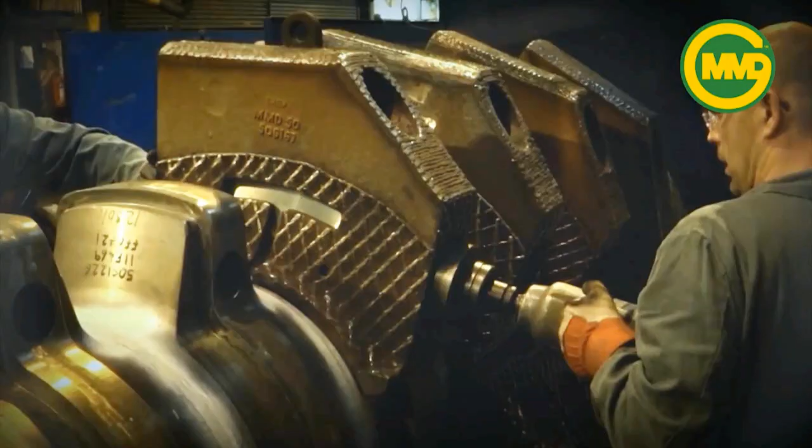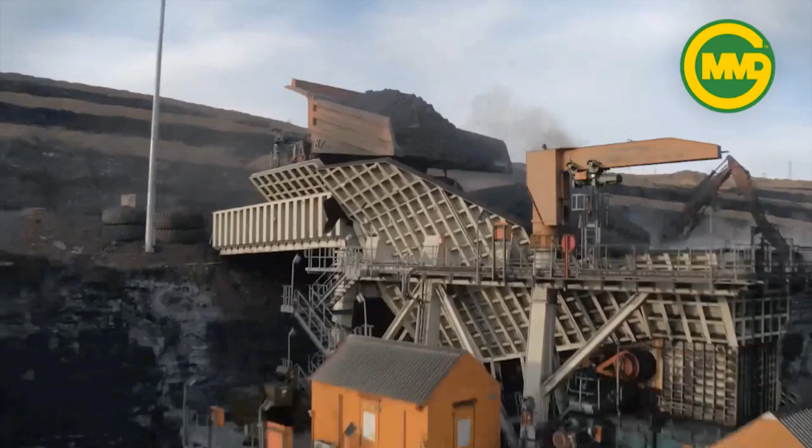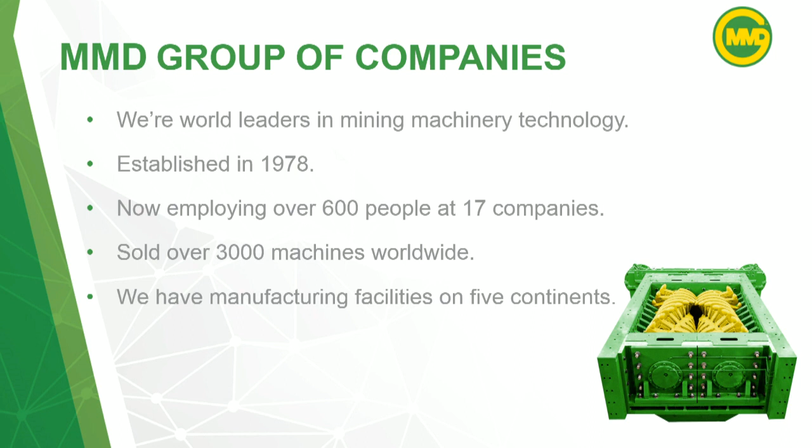So just a short video of MMD's existing equipment to show you what our capabilities are. A quick rundown of who we are. We believe that we're world leaders in mining technology. We were established in 1978, just over 40 years ago. And from a company that started with 10 or 12 people, we're now employing over 600 people in over 17 companies around the world.

We've sold over 3,000 sizers in many countries around the world. We now have manufacturing facilities on 5 continents. A quick overview of where our offices are around the world. We have an even spread in most parts across the world. And our manufacturing facilities: the UK, top left, is where we started, and that's the same office today as we started in almost 40 years ago. Australia, China, South Africa, and India. So we're very proud of what in essence is a small, family-built company.

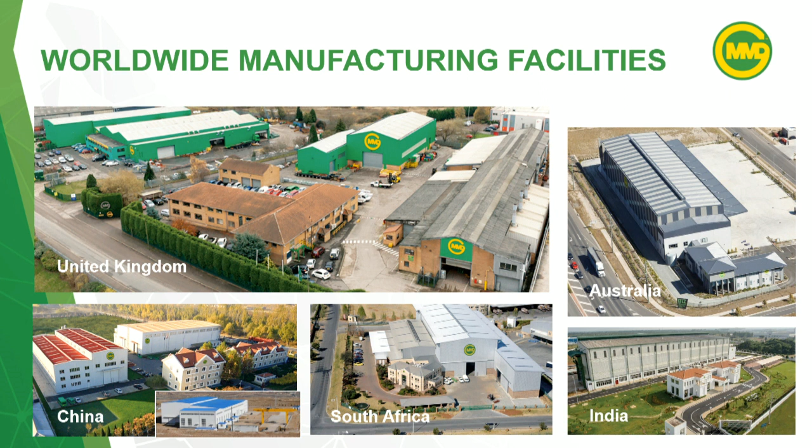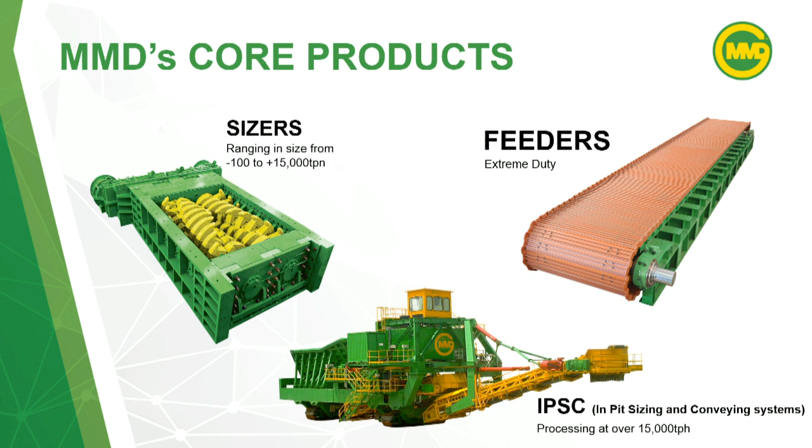Our core products: initially we started with the sizer there on the left. Pretty simple piece of kit, but we've now sold over 3,000 of those machines, doing anywhere from under 100 tons an hour up to over 15,000 tons an hour. We then went on to manufacturing feeders, not necessarily because we were looking for a different product. We were just looking for a feeder that we could dump a truck onto, and we couldn't find one out there.

So what we made is what we call an extreme duty feeder, because everybody calls their feeders heavy duty right now. It's not the cheapest feeder in the world, but it is the strongest feeder in the world. And we incorporated those 2 pieces of equipment into many mining applications: static, semi-mobile and mobile in-pit sizing stations. A typical example is one we did in China, center bottom, approximately 3 years ago, which is processing over 15,000 tons an hour.

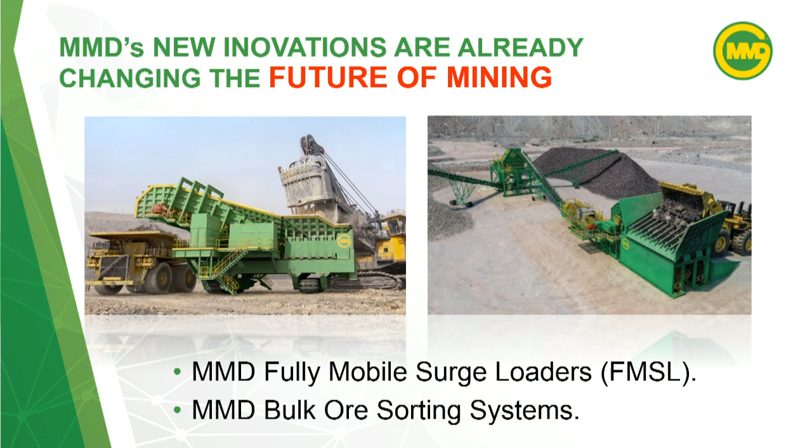So, the future of mining. We like to think that's exactly what MMD is doing. What I want to talk to you about today is 2 new pieces of kit that we've put on the market. Although a lot of the pictures I'm going to show you are animations, both are actually manufactured. The fully mobile surge loader is currently being built and will go into operation at the Rio Tinto copper mine towards the end of next month. And then the bulk ore sorting system, which I'll touch on briefly as we're doing another, more detailed presentation on that at 2:30.

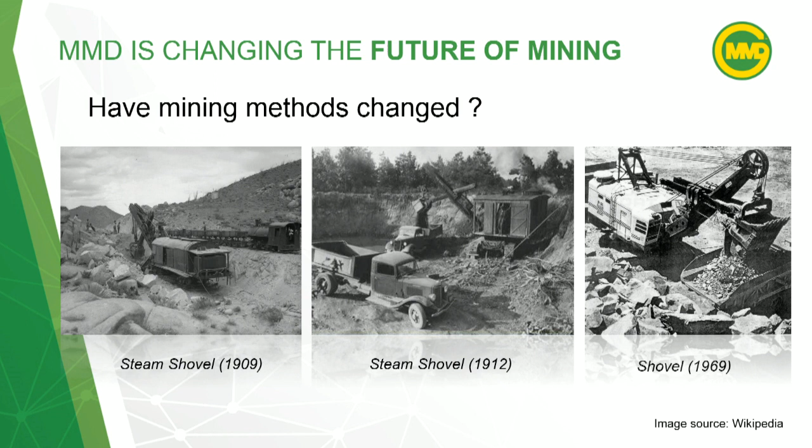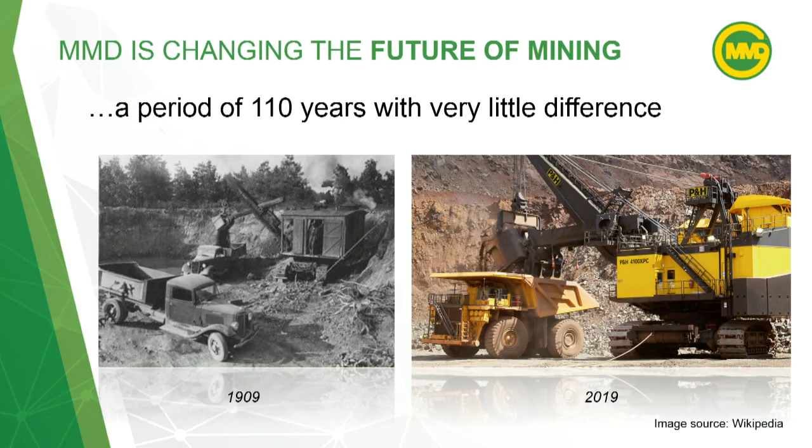So, what are the problems? We did a search on Wikipedia for trucks and shovels, and this is what we found. In a period of over 100 years, 1909 to 2019, other than the scale, pretty much nothing's changed. All around the world, the shovel is regarded as an essential investment for mining. However, when partnered with trucks, their efficiency drops drastically.

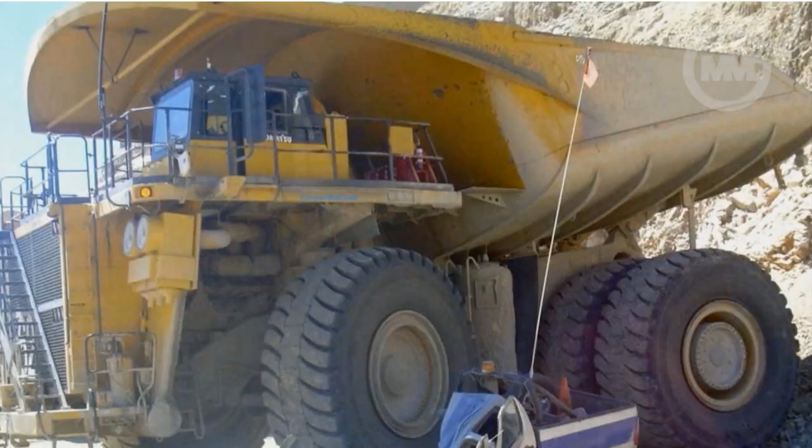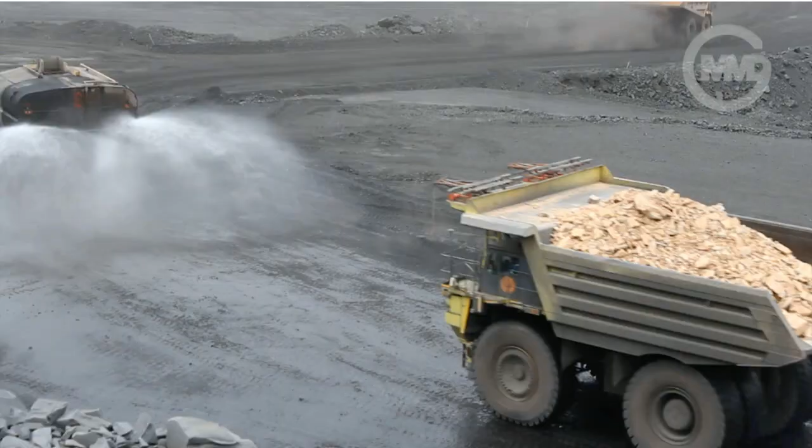Safety being paramount, the shovel is forced to wait while each truck maneuvers into position. Loading raw material directly into the truck is challenging. A fluctuating volume of material in each shovel bucket and the size of rocks results in a variable fill factor for each truck. This can lead to truck bed damage or underutilization. The number of shovel swings and the time required to fill each truck becomes unpredictable due to the material digging process.

The impact of irregular loading wreaks havoc with fleet cycle times, with trucks getting congested or too spread out, leaving the shovel waiting again. These issues are repeated time and time again with each truck.

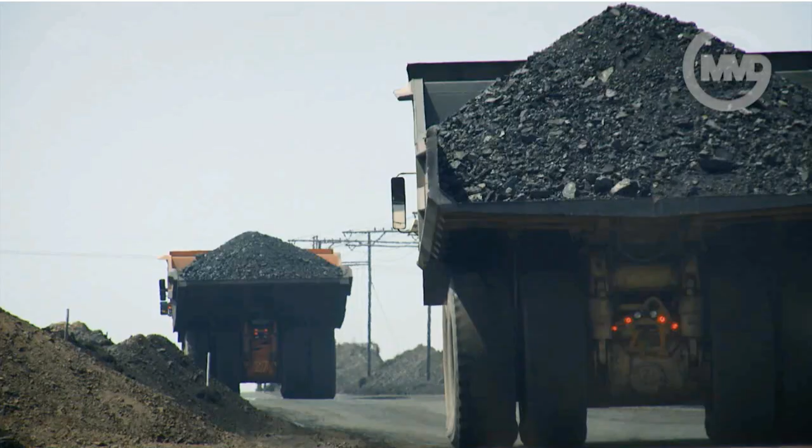So there are just some of the issues with the current truck and shovel mining method. So, traditional truck and shovel, they rarely fulfill their potential. Shovels these days are built to do 10,000–12,000 tons an hour, but we've yet to find one that consistently does that, and usually they only operate at between 6,000 and 7,000 tons an hour. The reason being either waiting on or the manoeuvring of trucks.

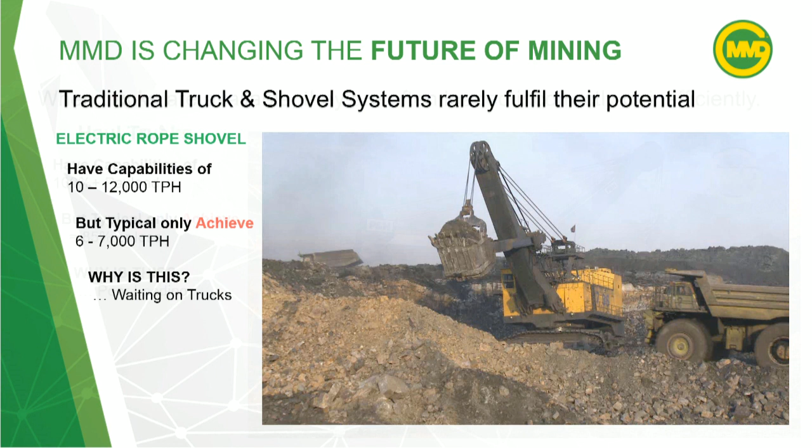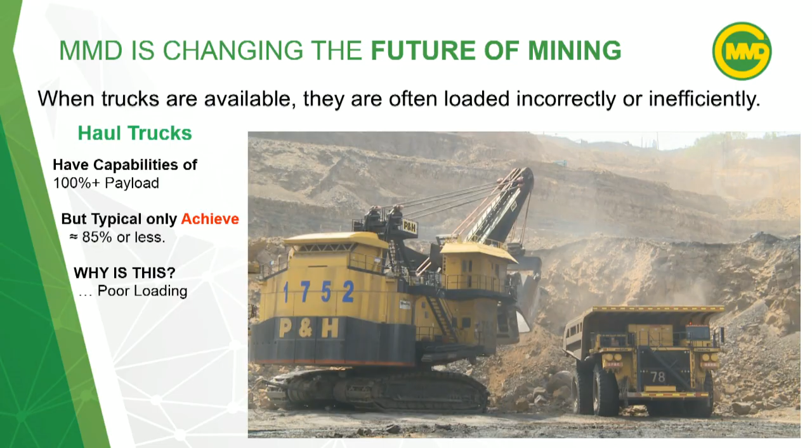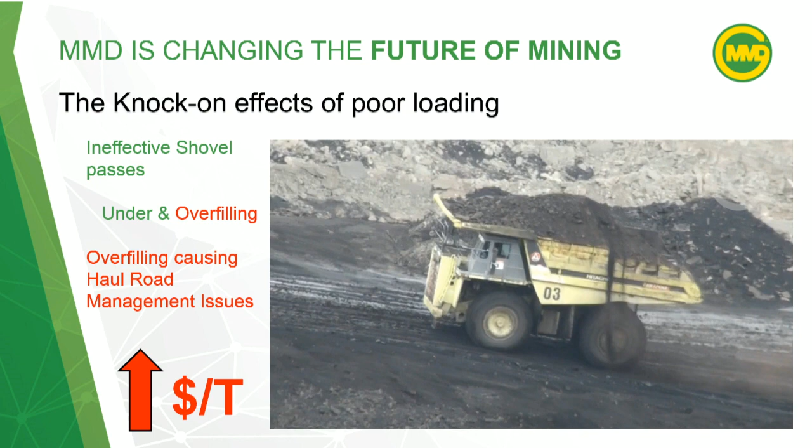So when the haul trucks are available, it's difficult to load them to the maximum payload. You know, if a truck takes 300 tons, do you put 3 shovels in it, or do you put 3.5 shovels in it? And if you put a half a shovel, what are you losing there, time-wise? So typically, trucks are only ever loaded to a nominal 85% or even overfilled. The reason for this, poor loading. The knock-on effects of this poor loading are either an underfilled truck or an overfilled truck. Overfilled trucks having issues with the haul roads.

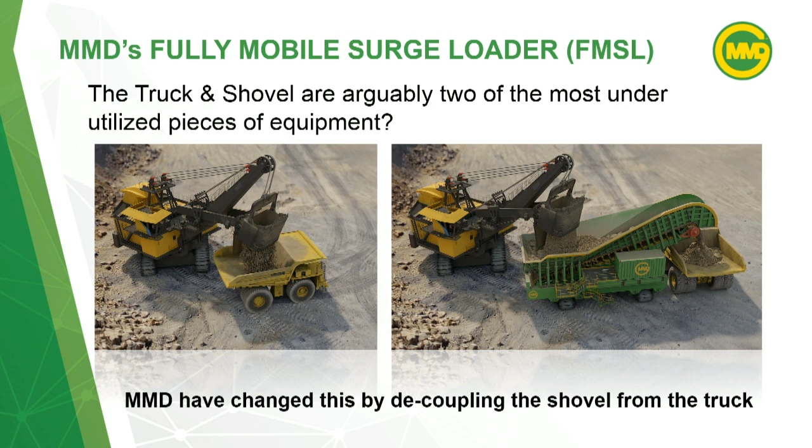But now, introducing the very latest innovation from MMD, the fully mobile surge loader. A mobile feeder designed to tackle intermittent loading in truck and shovel operations. Firstly, trucks are spotted using the latest 3D cameras and RFID technology, or simple mechanical markers to assist truck alignment. Trucks are loaded faster than when they're loaded directly by the shovel, in a method that is also safer and reduces wear on the truck fleet.

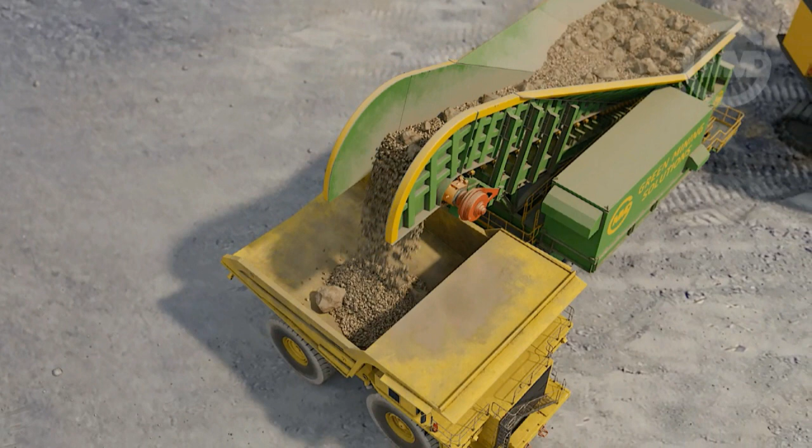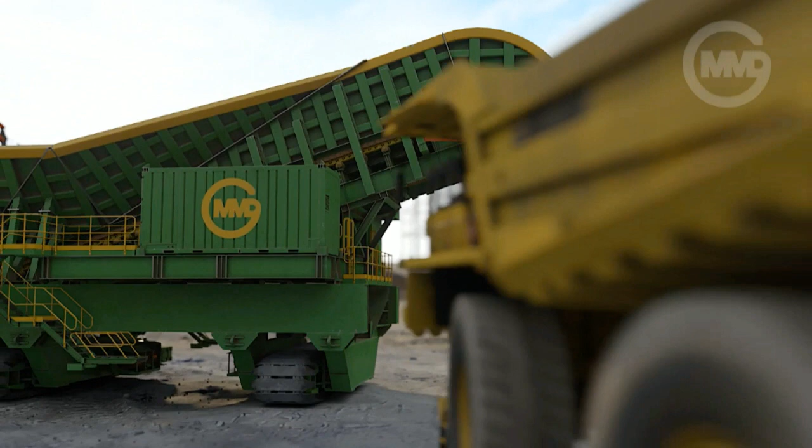The shovel operator continues loading unrestricted while the hopper stockpiles material ready for delivery to the trucks, maximizing shovel utilization to nearly 95%. The surge loader provides the optimum fill level to every truck via material level detectors. This ensures each truck is hauling at maximum capacity. With the shovel working continuously and the trucks spotting and loading faster, the system efficiency increases. The answer to truck and shovel inefficiencies is here: the MMD fully mobile surge loader.

MMD, Green Mining Solutions. So what we've done is we've taken away the need for the shovel to have to stop working, waiting for the truck, and the truck to arrive and waiting for the shovel. Both can run and rely without the other one being in operation.

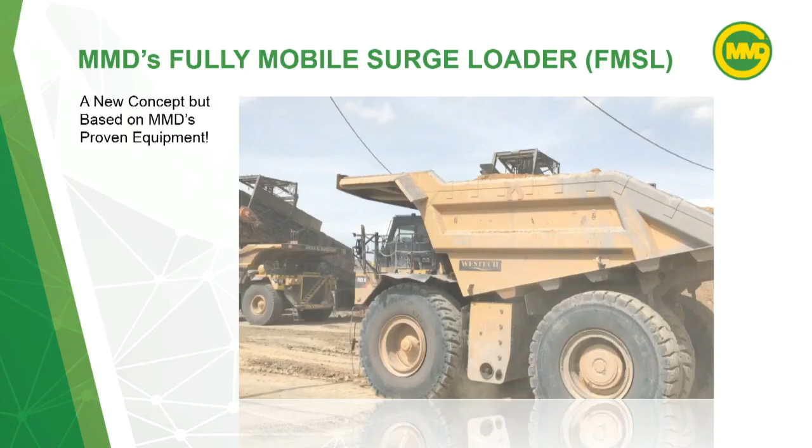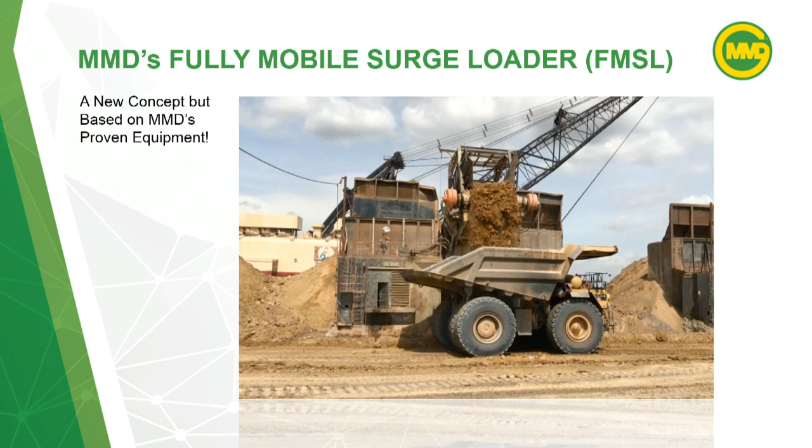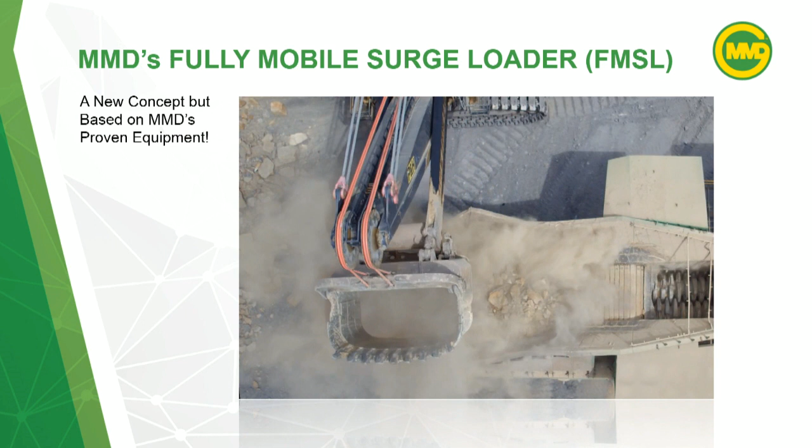In 2004, MMD successfully implemented a feeder loading system in Colombia. A dragline fed the MMD stations, which were capable of loading several trucks simultaneously. A solution which is still in operation today. The 2013 fully mobile sizer, perfected in China, provides the basis for making the surge loader a mobile solution. The integrated hopper, feeder, and twin crawlers all feature on the new MMD design. Proven technology from Colombia and China combined in the fully mobile surge loader.

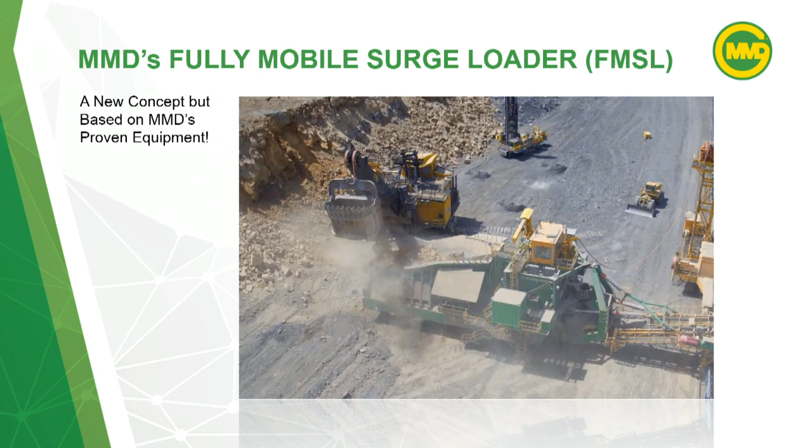So what we're trying to show there is, although the surge loader is new to MMD, the equipment, mainly the tracks and the plate feeder, are not new. We've been making them for many years. So it's existing equipment, just put in a different configuration.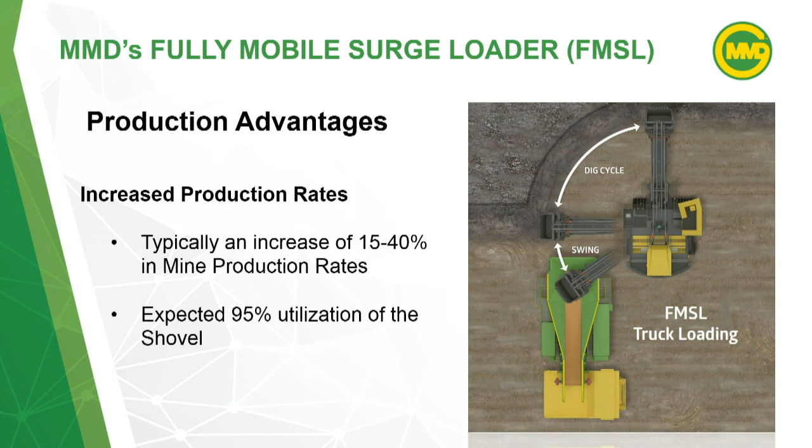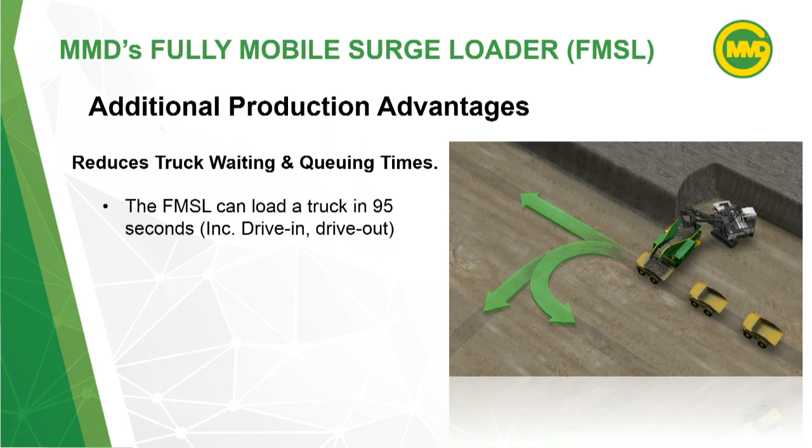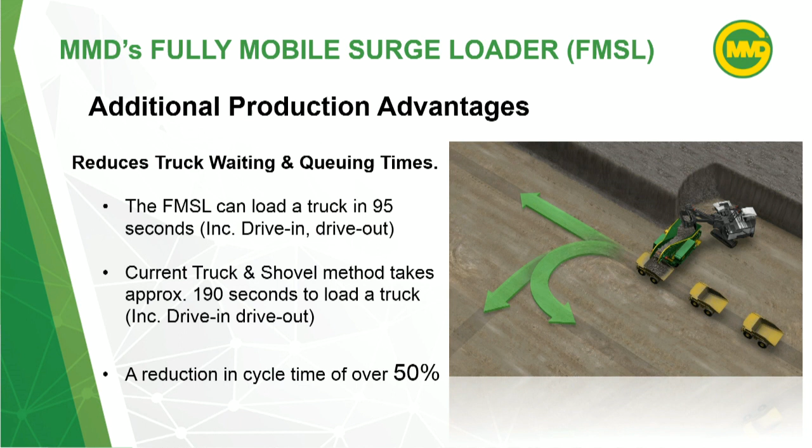So the production advantages of the surge loader: increased production rates. Typically, an increase of between 15% and 40% can be seen. The utilization of the shovel can go up to 95%. It reduces truck waiting and queuing time. The surge loader can load a truck in 95 seconds. That's drive in, drive out. The current truck and shovel method takes approximately 190 seconds to load a truck, drive in, drive out. So right there you've got a reduction in time of over 50%.

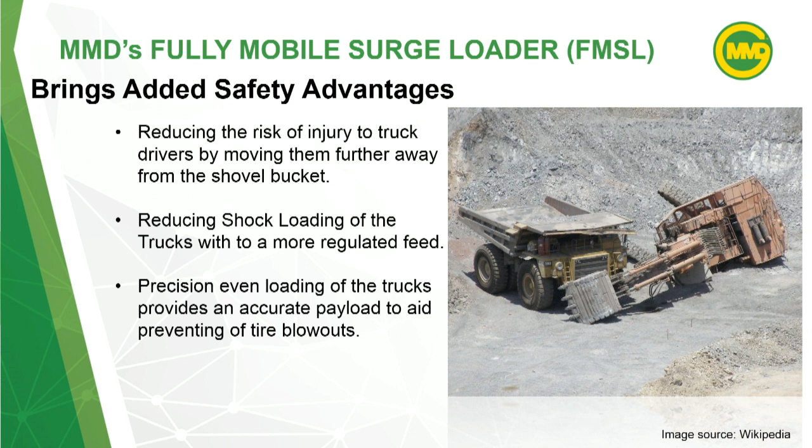There's also a number of added safety benefits with the surge loader. Firstly, you're moving the truck driver away from the dump point of the shovel. You're reducing the shock loadings because it's an even feed of material onto the truck. He's now not getting an instant 100-ton load onto the back of his truck. Because we're loading the truck in the precise position, it reduces the potential for tyre blowouts. The spotting is much simplified because he's driving forward in and driving forward out. No reversing manoeuvres required.

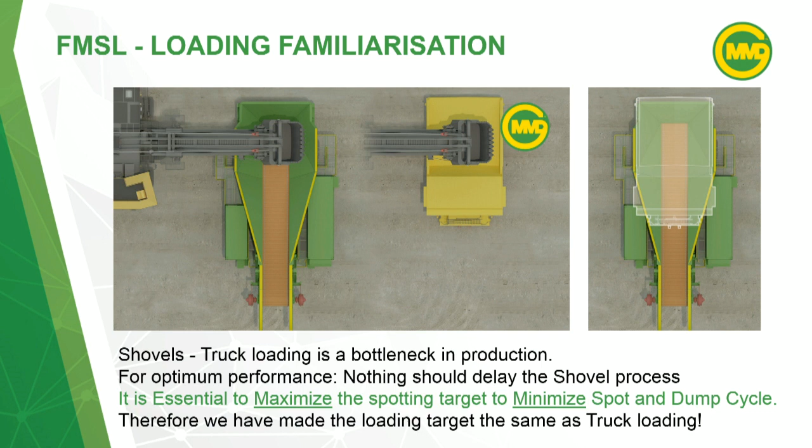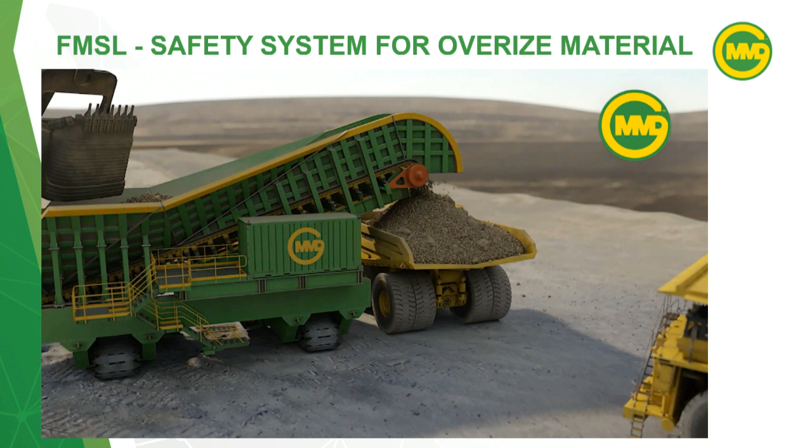The MMD fully mobile surge loader has been designed to load haul trucks faster, more efficiently, and safer than ever before. With safety as a top priority, MMD have integrated a loading protection system to protect both the driver and the truck from the impact of large boulders.

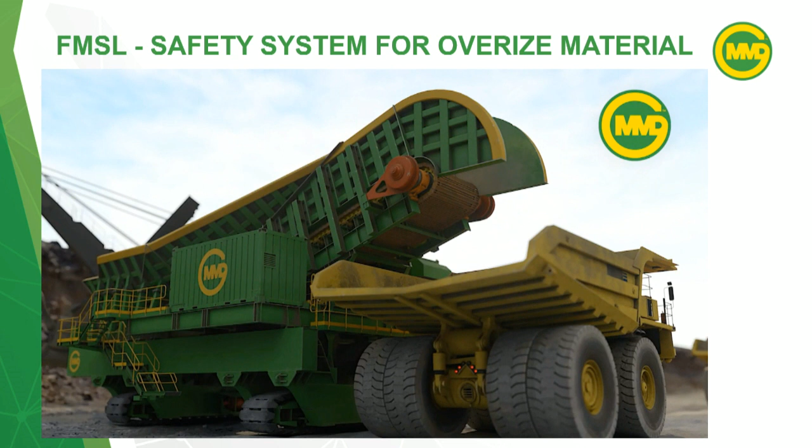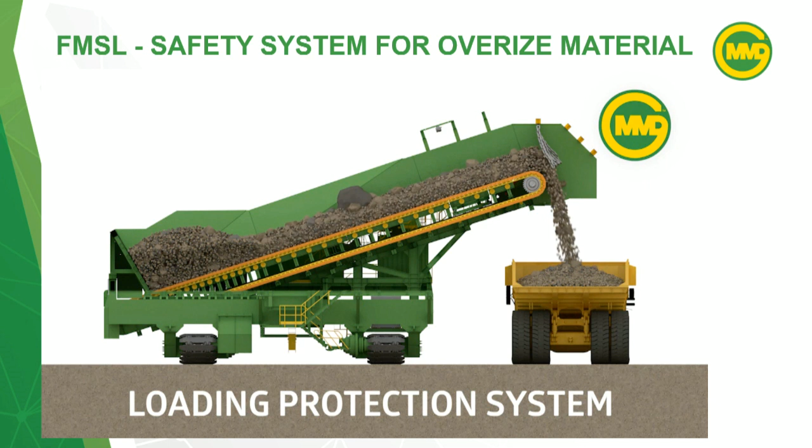The surge loader continually analyzes the fill of each truck, assessing whether the load would be unstable with the addition of a large boulder. The protection system is triggered when a large boulder is identified by the oversized proximity sensor. If the truck cannot accept the boulder, the feeder stops and reverses to draw back material.

A heavy-duty chain curtain assists in holding back the material from the tip point. If the additional boulder would create an unstable load, the truck is signaled to depart. When loading the next truck, the bed of material preceding the boulder acts to absorb the impending impact and reduces wear on the truck body. Normal loading resumes until the system is triggered once again.

MMD, Green Mining Solutions. So simply put, what we're trying to show there is that it's as important to not overload the truck as it is to load it to the right level. So the surge loader is an autonomous piece of equipment, no operators. So how does this thing move?

The shovel operator is happily digging away at material, putting it into the surge loader. Eventually he runs out of material and has to move his shovel. What he then does, he has an HMI screen in his cab, and he taps the screen. On this particular operation, he's tapped at 3 o'clock. He wants the surge loader or the dumping point to be at 3 o'clock from his shovel.

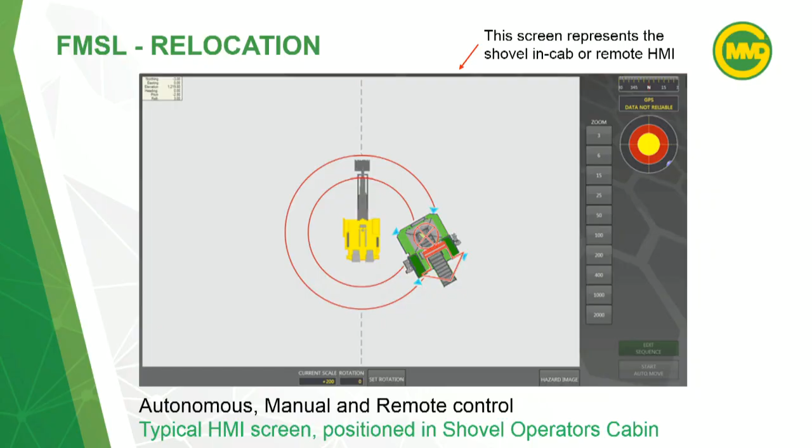He swipes his finger down to a southeasterly direction. That's the direction he wants the feeder to discharge at. He then presses a button and the GPS system brings the surge loader to that point. So, because of its versatility, excellent maneuverability, on-the-spot turning and compact size, the surge loader can work on a bench that's only 65 yards wide. And that's based on the D10 15,000 ton per hour surge loader.

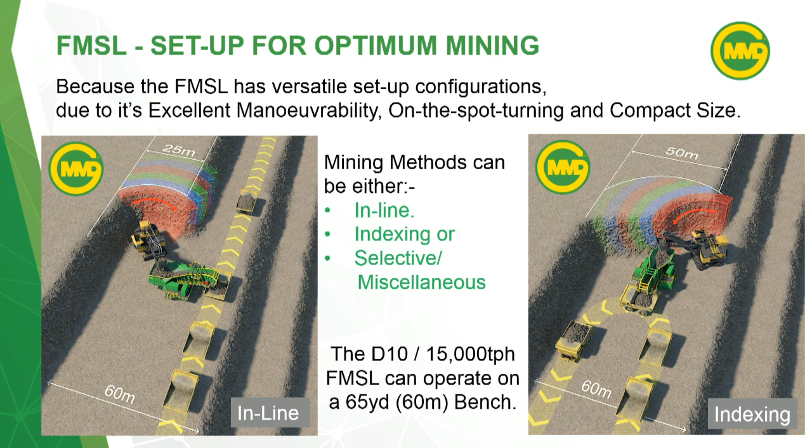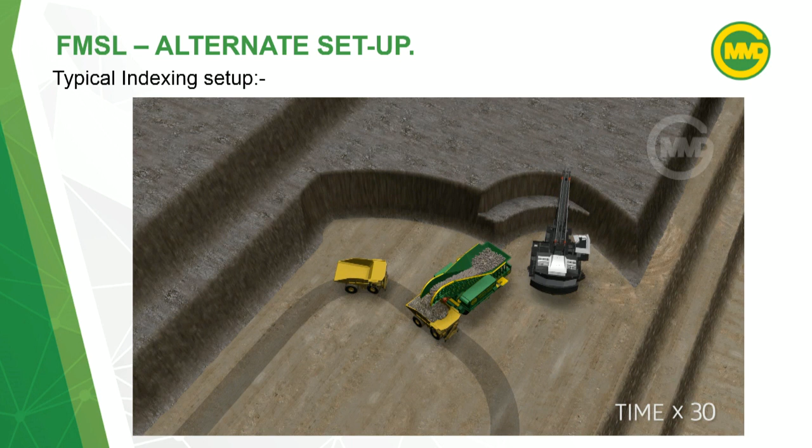Just a short animation here showing a typical indexing mining operation. Trucks are driving in forward and out forward. Shovel operation is not waiting on trucks. So we've done a couple of comparable scenarios or setups here. We've based this first one on a 60 cubic meter rope shovel and a 350 ton capacity truck.

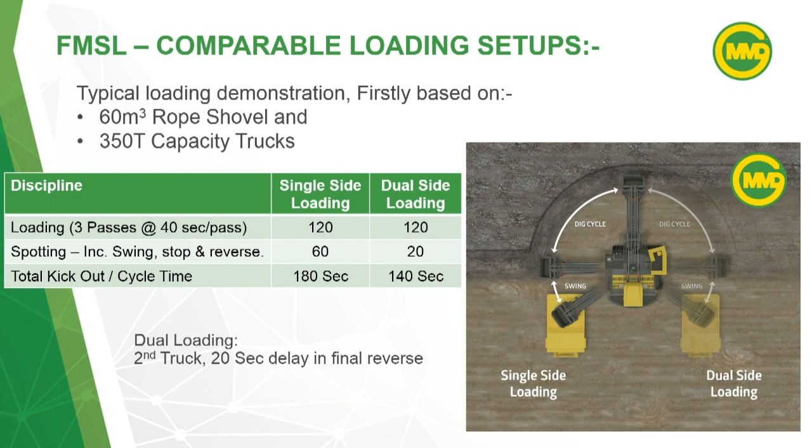So to load that truck, it takes 3 passes, 120 seconds. The spotting time, because it has to back and reverse in, takes 60 seconds. So the total kick out or cycle time is 180 seconds. On the right-hand side there, if you can load dual trucks, the loading time is still the same, 3 passes at 40 seconds per pass, but the spotting time comes down to 20 seconds. So even with a double-sided loading application, you've got 140 seconds loading time.

So on this one, we've done exactly the same shovel, a 60 cubic meter shovel and a 350 ton capacity truck, but we've put the 15,000 ton per hour surge loader between these. So the loading time, because we're now loading at 15,000 tons an hour, comes down to 84 seconds. The spotting time, because he's driving forward in and forward out, is 20 seconds, making a total cycle or kick-out time of 104 seconds. And even on the double-sided loading, that's a 26% increase and a 43% increase on a single-sided loading.

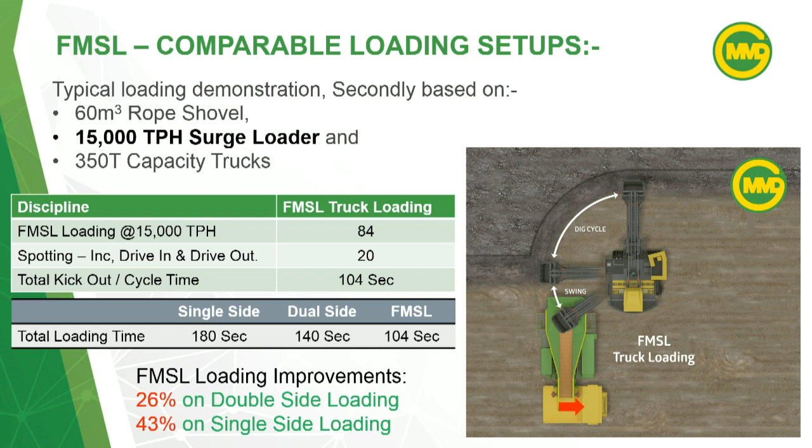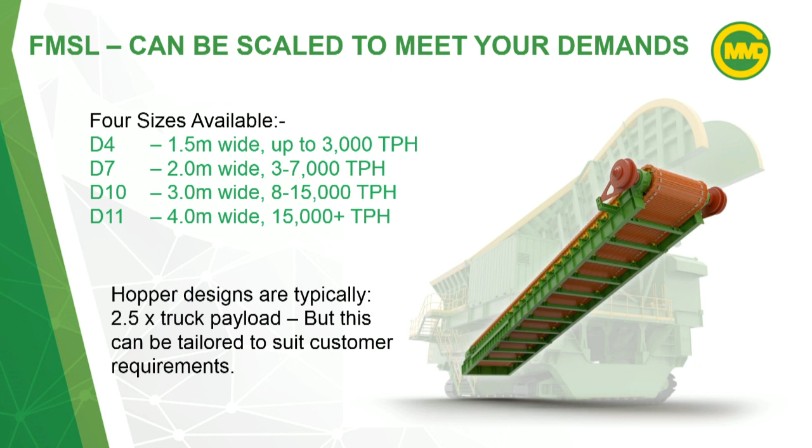The surge loader comes in 4 different sizes depending on what application you want to put it into, generally based on Caterpillar D4, D7, D10, D11. The D4 processing up to 3,000 tonnes an hour, the D7 up to 7,000 tonnes an hour, the D10 up to 15,000 tonnes an hour, and the D11 at over 15,000 tonnes an hour. Generally, we build the dump hopper at 2.5 times the truck capacity, but that can be custom built to suit client requirements.

Just some other pieces of equipment we have on there. Because we want to position that truck in an ideal, perfect loading pattern, we have what we call Christmas tree lights, positioning him as he drives in. He's looking at those lights, and the lights are flashing, telling him if he's coming in straight, whether he needs to move left or right. We also have those on the sides of the machine at the cab line, so he knows where and when to stop.

The RFID sensors pick up the RFID tag on the truck, so we know exactly what truck's coming in, what size the truck is, and what bed he's got on there, so we know exactly how much tonnage to put in there.

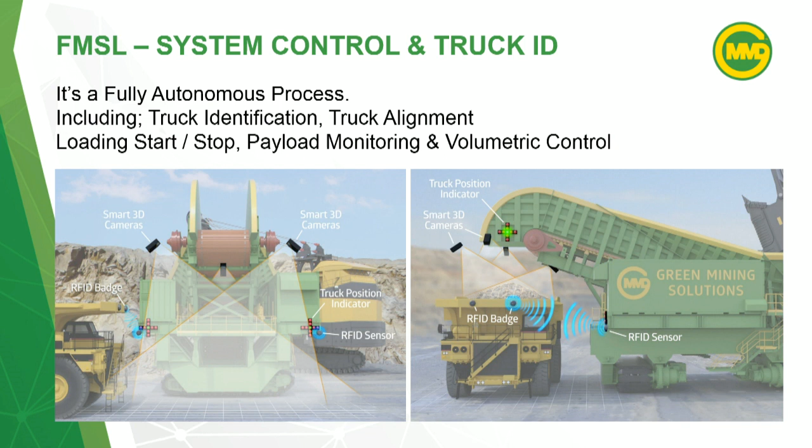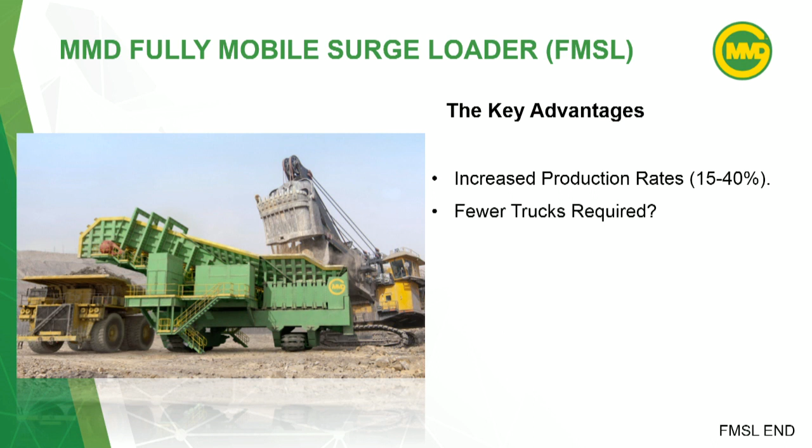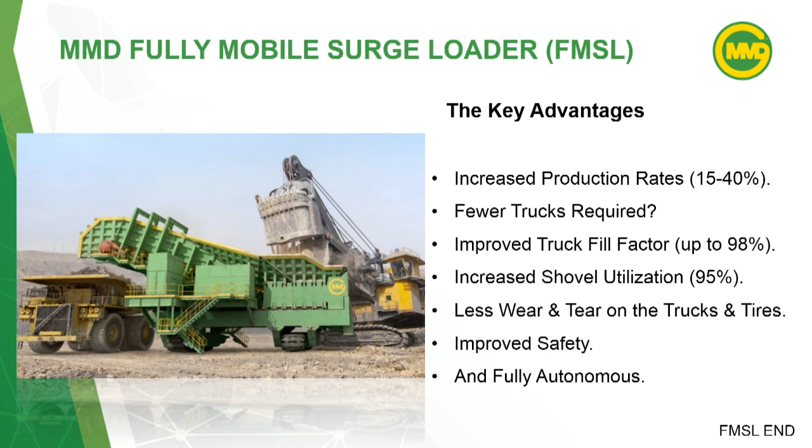So, the key advantages of the surge loader: increased production between 15 and up to 40%, fewer trucks required, improved truck fill factor. Now we can fill a truck up to 98%. Increased shovel utilization. The shovel's now working up to 95% of its capabilities. Less wear and tear on the trucks and tyres because we put an even load on the truck. Improved safety. And it's all fully autonomous. So that's the surge loader.

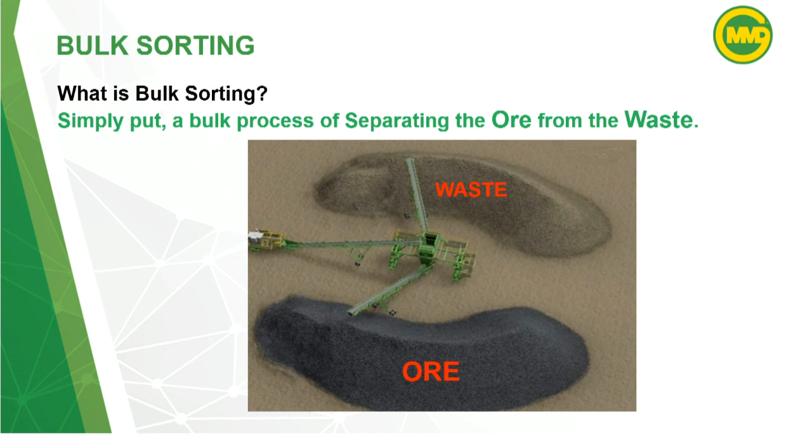So what are the benefits? Firstly, improved ore and waste management. The sooner you can process and identify those two materials, the sooner you can make a decision on what to do with them. Hauling only the ore and not the waste to the process plant. Why transport the waste to the processing plant when it's of no use to anybody?

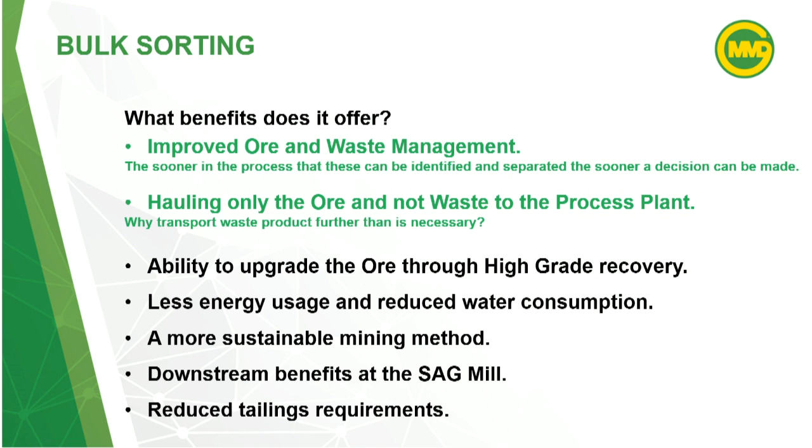Gives you the ability to upgrade the ore through high-grade recovery. There's less energy usage because you're only processing the ore that you need. It's a more sustainable mining method. It gives downstream benefits at the SAG mill and reduces tailings required.

So, how does it work? It's an ore analyzer. These things have been around for many years now, and MMD aren't making the ore analyzer. We're just putting it in a different position. What are MMD doing that's different? We are deploying the sensor in a completely new setup than traditional methods. We are bringing the sensors closer to the mine face to reduce the potential of diluting material further than is necessary.

Here's just an example of some of the sensors that are already out there on the market. X-ray fluorescence, gamma neutron activation, fast thermal neutron activation, and magnetic resonance. And there's just a short list of some of the manufacturers of that equipment.

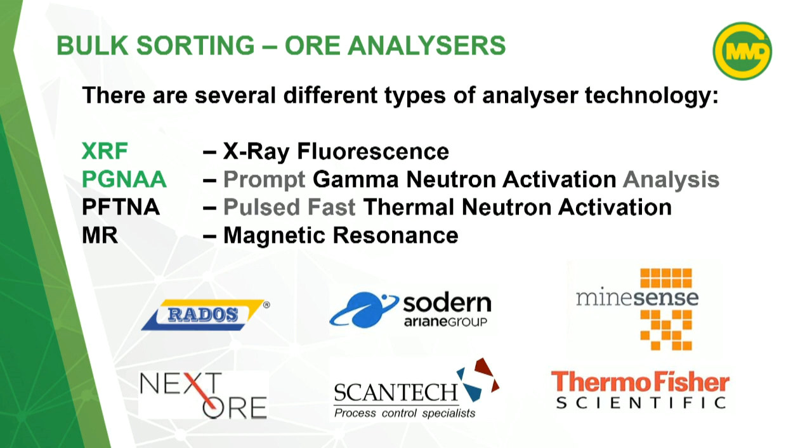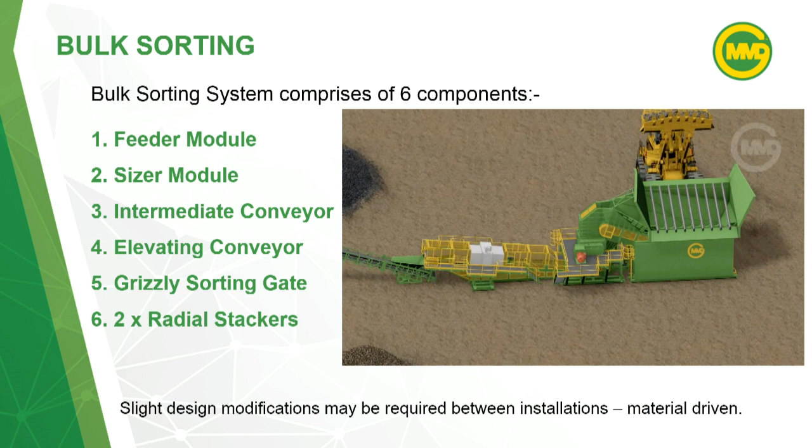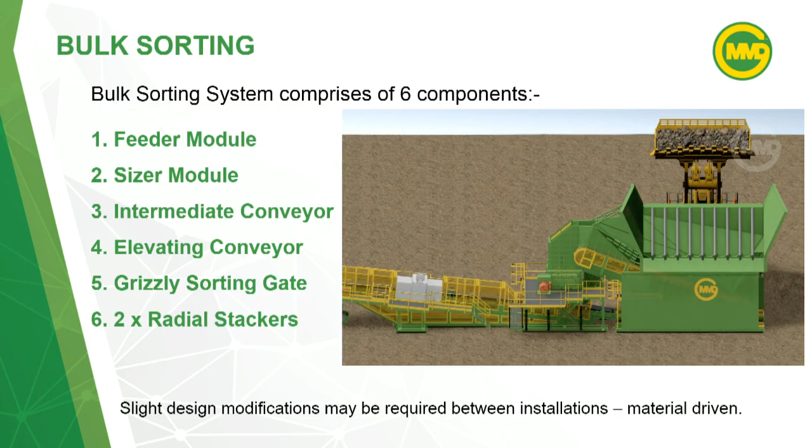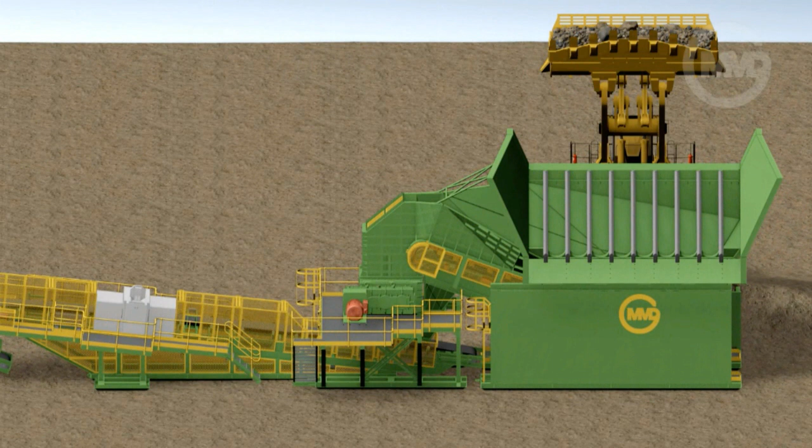So the bulk sorting system has 6 separate pieces: the feeder module, the sizer module, the intermediate conveyor, elevating conveyor, a grizzly sorting gate, and radial stackers. System operation is commenced, with material delivered into the receiving hopper directly onto the MMD heavy-duty apron plate feeder. The regulated feeder drive ensures a consistent material feed into the system.

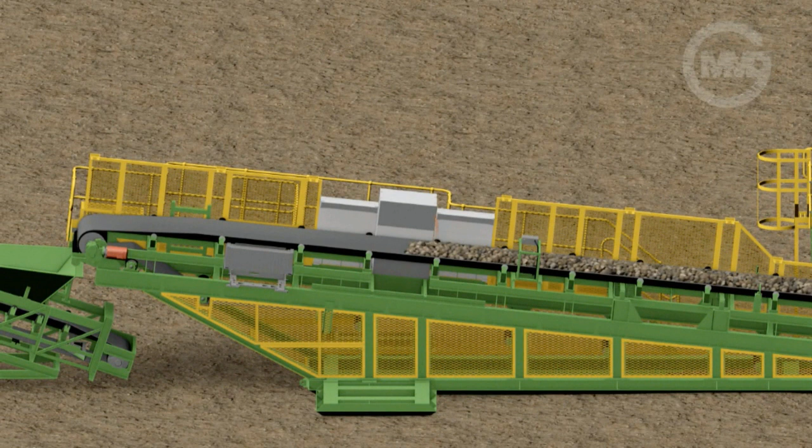MMD's patented twin-shaft mineral sizer sizes material to a defined three-dimensional product size. Deploying advanced technology, an ore analyzer sensor unit assesses the quality of the raw material. Utilizing neutron generators and gamma rays, it determines material quality as waste or ore. The sensor takes a 30-second cycle to complete its assessment of material.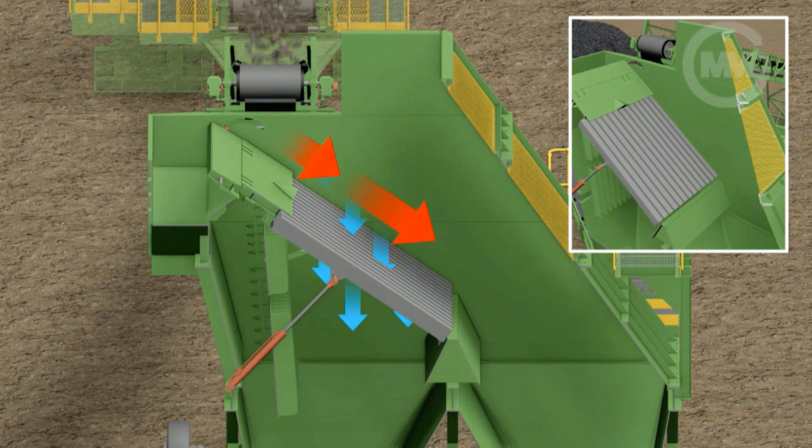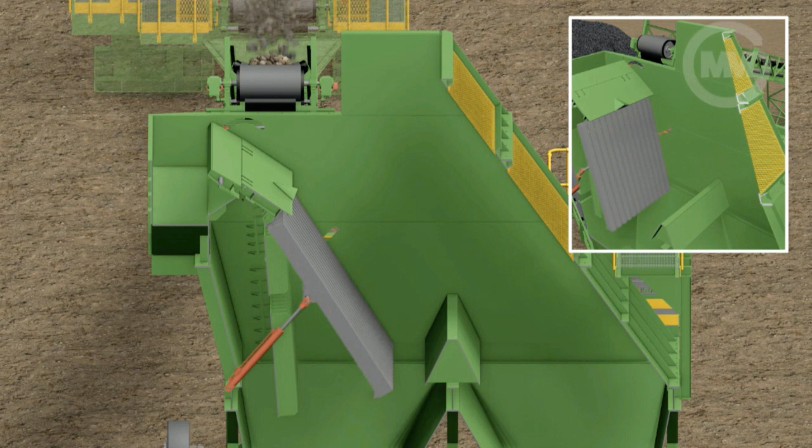Integral to MMD's system design is an automated sorting gate, which is operated by the ore analyzer sensor unit. When closed, waste material is diverted off. Fines minus 25 millimeters are captured for the ore stockpile. Alternatively, when the sorting gate is open, 100% of ore-grade material is captured. The sorting gate also works with an integrated cleaning comb to ensure any material blockages are removed during operation.

Material is efficiently diverted onto two radial stackers, one for ore and one for waste. The grading of material to be captured can be customized as required. Production efficiency increases dramatically and operating costs drop. So, although that is obviously only an animation, we do have these systems in and operating.

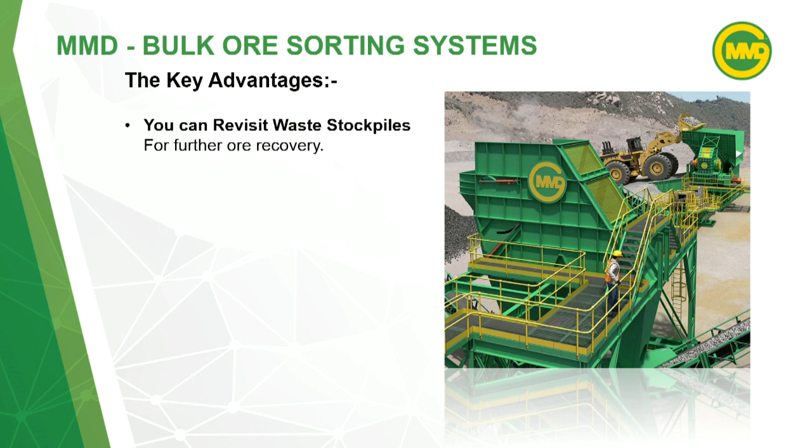So the key advantages of the bulk ore sorting system: you can revisit existing waste stockpiles for additional or further ore recovery. It reduces the processing costs because you're only processing the ore material and not the waste. It reduces haulage costs because you're only hauling the ore and the waste can be left in the mine. It's an automated system, requires no personnel to operate the plant, all giving increased productivity, a reduction in OPEX costs, and increased profitability.